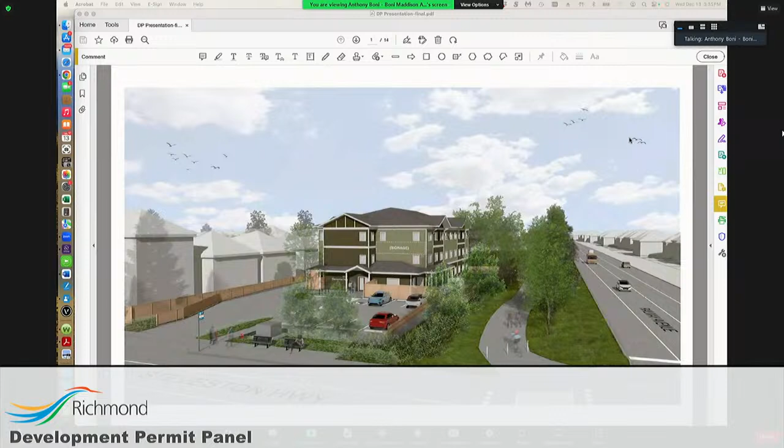Yes, a 25-unit supported housing project funded through CMHC, being operated by Turning Point Housing Society. Of the 25 units, 10 are 2-bedroom units, all of which meet the BUH Richmond accessibility requirements, 2 of which are fully accessible. And there are 15 studios, 4 of which meet the BUH Richmond accessibility requirements. So 56% of the units meet the BUH. There will be 24/7 staffing that will provide some programming and counseling supports to the women and children that will be living in this project.

So just a little bit of context to the site. As you all know, it's at the corners of Steveston and Railway. Can you still hear me? We can, there was a glitch there, Anthony. I'm not sure, just keep going, we'll let you know if it's a problem.

Can you hear me now? Yeah, I can, can you hear me now? Yeah. No, well, you're going to keep going till we can't hear you. Can you hear me now? I can, okay, sorry, my apologies.

We tried as much as we can to create as much setback between us and our neighbors to the west, 10 to 10.6 meters from building to building. Our building setbacks are even more than the existing townhouse setbacks are to the property line. And our neighbors are a combination of 2- and 3-story townhomes.

Part of the site issues to deal with is the access point is far away from the corner as much as possible. We've enlarged the bus loop to make that work. And all the on-site circulation is done through transportation studies to meet parking access, pickup for garbage, and all those things. Some of the site layout issues that we worked with.

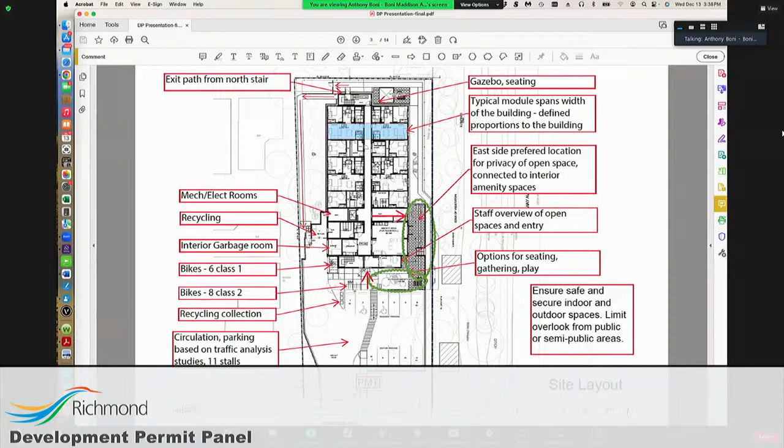And one of our strong mandates was to ensure that we provide safe and secure outdoor spaces for the residents.

So at the north end of these retaining walls, there's about a meter difference, and then it slopes down to meet the property line on the south side. So this created this raised area, and it was a bit challenging. On the east side, we were limited to a retaining wall to the setback for the force main. So that kind of created the dynamics of how some of the site was working.

At the north end of the property, we go back down to natural grade, and we mediate with the grade on north, east, and west sides of this property. We've tried, like on the fencing on the west side, not to create too high a difference between us and our neighbor, about a 4-foot fence on that west side, so that on our neighbor's property it wasn't such a high wall there. So everything slopes down from the entry point down to the site.

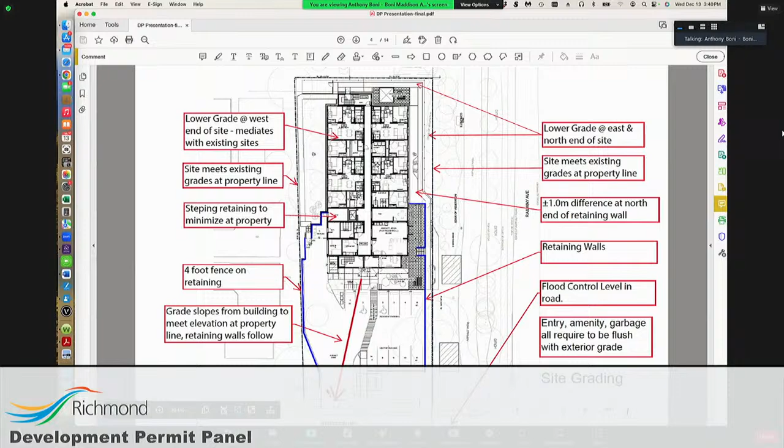Ground floor in a bit bigger detail. You can see how we've got the amenity spaces, the offices, which provide some look over and overlook to the entrance, to the common areas, and to the common rooms. So there's some good functionality there.

There's also some play room inside the building, and the exterior play area that Kristen will talk more about for children and for others. There's another alternative outdoor space at the north end of the property, not to have only one location for residents to enjoy outdoor space, on the northeast corner.

Sorry, let's go back to the ground floor. So the ground floor also has four two-bedroom units as well. And there is an elevator in the building. There is interior bike storage for the 10 Class 1 bikes.

We've added an additional 6 Class 1 bikes outside. There was some discussion at earlier stages about, if we have a lot of tricycles and things like that, where to put them. So we've tried to add a bit more bike locations than was otherwise required.

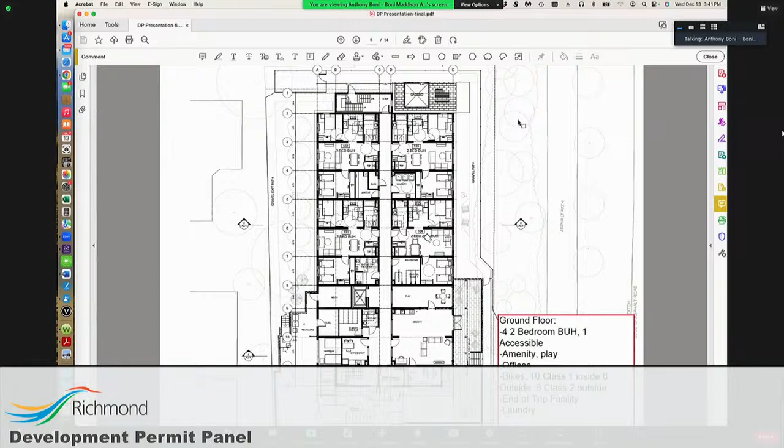Second floor, 6 two-bedrooms. On this floor, lounge spaces, common laundry spaces, storage spaces for the residents. Third floor, all studios on this level, 4 of which, as I mentioned, meet the BUH requirements, and again, some laundry and storage to meet the needs of those residents on that floor.

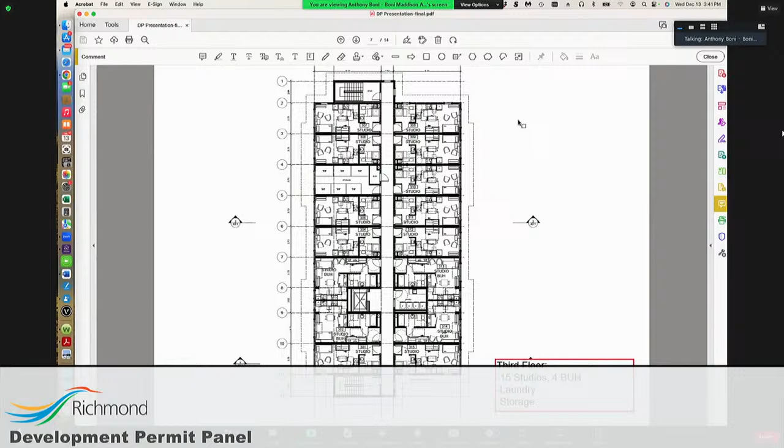The exterior articulation picks up cues from the neighbors and the residential feel, with pitched roofs. The bottom elevation faces a railway and is probably a more prominent facade, so we've tried to break up the elevation with dormers and different materiality to break down the scale of the building, even though it isn't that big.

You can see at the bottom left that red line showing the grade implications, from the street going up to this little podium level along that side.

That's the grade I'm showing here. The red line shows the grade difference, and around here is where the retaining wall goes back down to grade along that side.

On the west elevation, which faces the townhouses, there's a similar articulation of the building masses. This is our front door. It's a bit more modulated because the stair module sticks away from the main building, creating some shadows and dormers. We've also incorporated a canopy that wraps around the front and the east side of the building, around the corner, creating nice covered spaces for residents on the entry side as well as into their outdoor space.

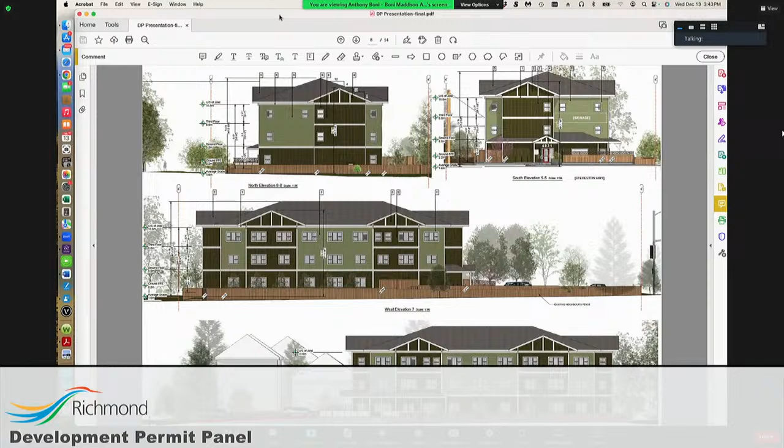The materials on the exterior are all pre-finished Hardie cement paneling and trims, all non-combustible. We're meeting Step 4 from the building code perspective, so there's exterior insulation as part of the building envelope, triple glazing, and all those things.

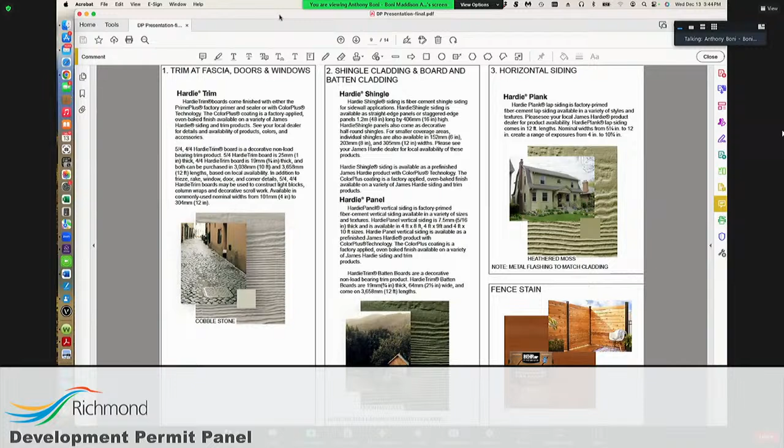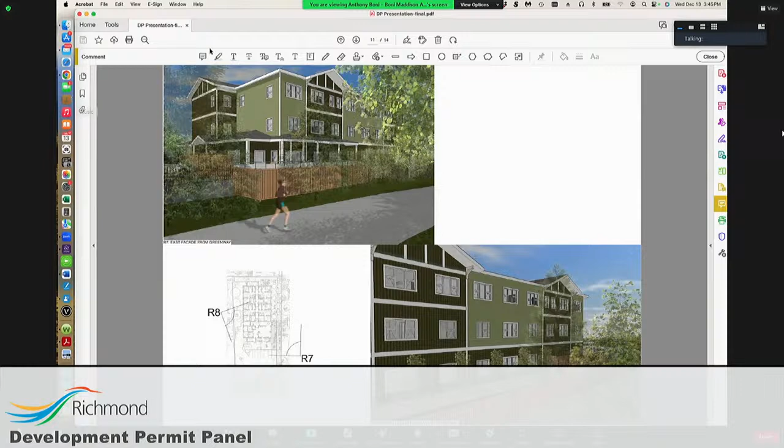Kristin can talk about the landscaping. Hey everyone. Anthony, you have control, I guess. I'll just tell you to go next when we need it.

As Anthony mentioned, we have a bit of grading restrictions here, so the amenity space has been divided into two areas. We want to focus on providing as much flexibility in the spaces as well as durability of these materials, so that it can be low maintenance for the people using the spaces.

Right off of the interior amenity, we have a flexible use deck, a little bit higher than the areas around it, adjacent to a small play area. The play area will have a storage bin for small toys, a little playhouse, and a mixture of surface textures with poured-in-place rubber and turf, so little kids can have a tactile experience. There's also a small seating area and movable furniture around so parents can keep an eye on the kids while also doing their own thing.

Moving down to the lower amenity space, from the stairs from that upper deck area, there's some nature play elements as we move along that space, with a few urban agriculture planters right there. This is all enclosed with that semi-permeable fence that Anthony mentioned before. There's two trees marked T which will be transplanted, but otherwise we've made efforts to retain all the trees and work around the existing vegetation.

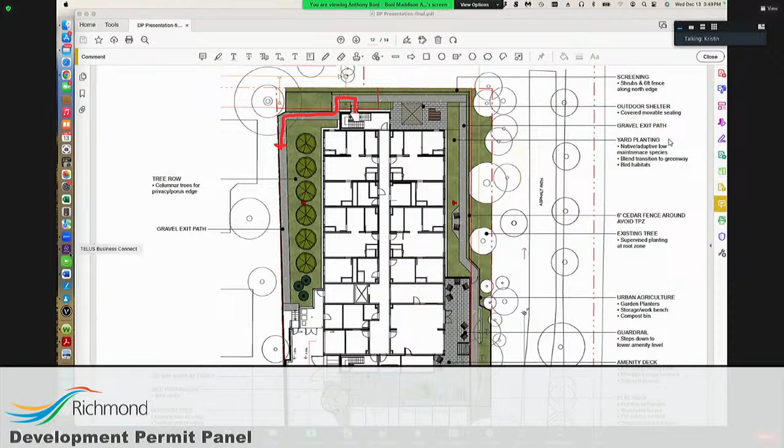If we can zoom out a little bit here, I talked about this amenity space already, but just some of the character elements that we have: the kind of flowering trees, movable furniture, low garden planters so parents and their kids can grow and get their hands dirty a little bit, durable paving, shelter, and play huts.

Next sheet. I just want to stress again, to be clear, this is the right of way here for the sanitary line that we have to respect—we can't build on it. So this is the edge of our retaining wall, which is on the edge of that setback. That's the dynamics we've worked with here.

If I could ask a question, there's a retaining wall and then there's a fence on top of the retaining wall—what is the total height of that? There isn't a fence on it there; the fence is over here, at the property line. On the retaining wall we just have a guardrail, I think a glass guardrail, because it's a falling hazard for kids. But the fence is not on the retaining wall on this east side.

So here's just the planting, if you want to look through that—it's a heavy focus on native species, very durable, low maintenance, but also some flowering plants providing colors, so it's year-round interest.

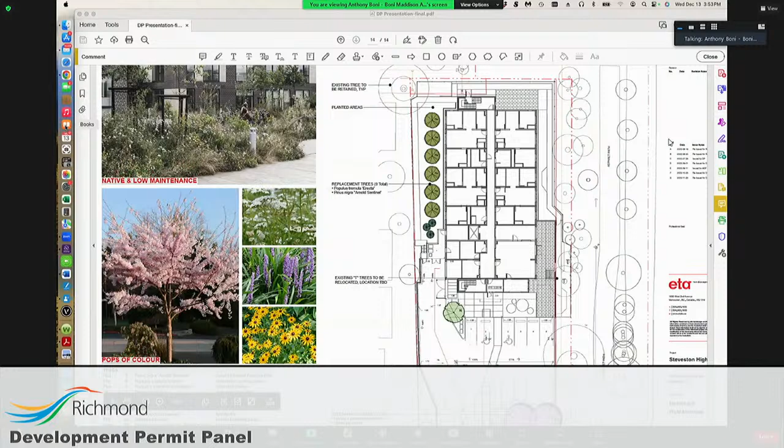So that's our quick presentation. Questions? I can go back to any drawings that people want to refer to. Maybe we'll go back to the regular screen.

Okay, Cecilia, Peter, any questions? No, my questions are answered. I just want to make sure that there's not too much of a height difference. Peter? No, I don't have any questions, Mr. Chair.

I did have a question about the retaining wall and the need, but I think it's driven by the floodproofing elevation. It seems as if you tried to keep it under control and you've been mindful of how it's going to appear from the public domain and the properties to the west. So that's great. So you lucked out, no questions.

Wayne, staff comments? Just a couple comments, Mr. Chair. There is a variance associated with this proposal. It is a technical variance based on the overall number of parking stalls. The zoning bylaw allows small car stalls for all parking lots that exceed 31 parking stalls in size. Due to the small number of stalls here, there is a variance required to allow the small car stalls.

However, in doing so, it does allow us to maximize the number of stalls provided and is consistent with the approach applied to larger parking lots where 50% of the stalls may be small car. With respect to parking, all of the stalls will be equipped with level 2 EV charging, including visitor stalls. The building has been designed to achieve energy step code level 4. And there is a servicing agreement for frontage works and site services associated with the project as well.